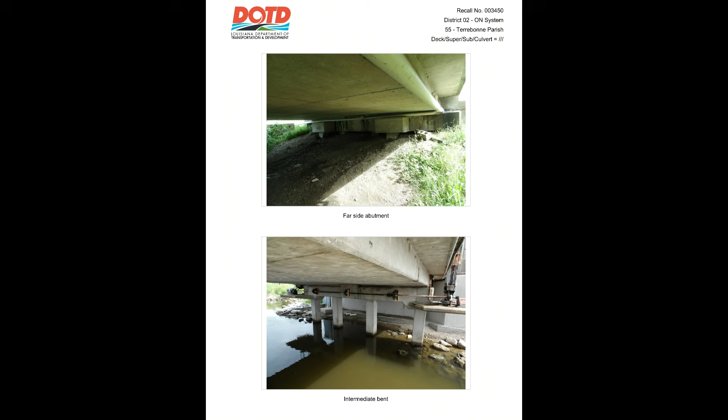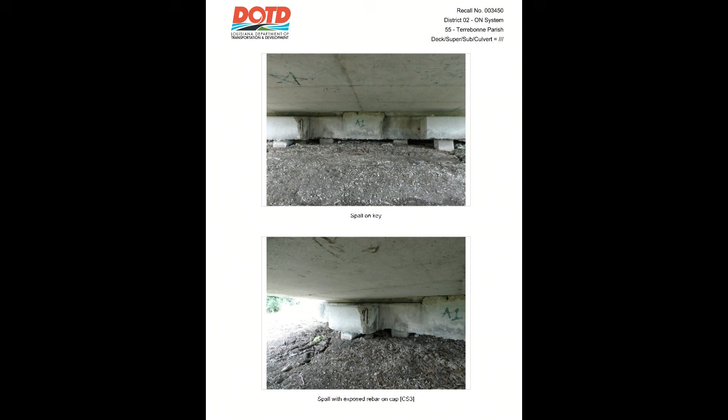Of course, that's kind of how DOTD works. They've got a time frame for everything, so we had a 2026 replacement date. However, this morning I was contacted by DOTD to tell me that they were doing an emergency shutdown of the bridge. So what happened, and I just want to be very transparent with your viewers and with the people of Terrebonne Parish, there was an inspection done by the Bridge City Department of DOTD in June of 2024. That inspection showed critical infrastructure deficiencies, critical problems with the bridge.

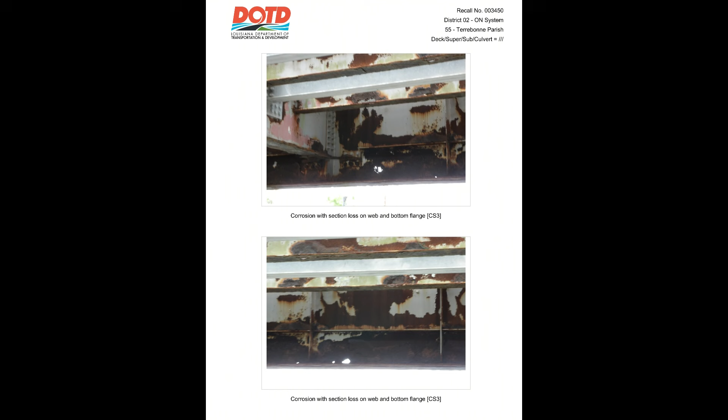June of 2024, I want you guys to remember this, by Bridge City. Bridge City failed to send that report to Baton Rouge. So who are the ones who actually schedule the bridge replacements? So the communication, there was a complete lack of communication, complete breakdown as far as DOTD goes. So they did not send the report with these critical deficiencies to the people here in Baton Rouge who are at the corporate office.

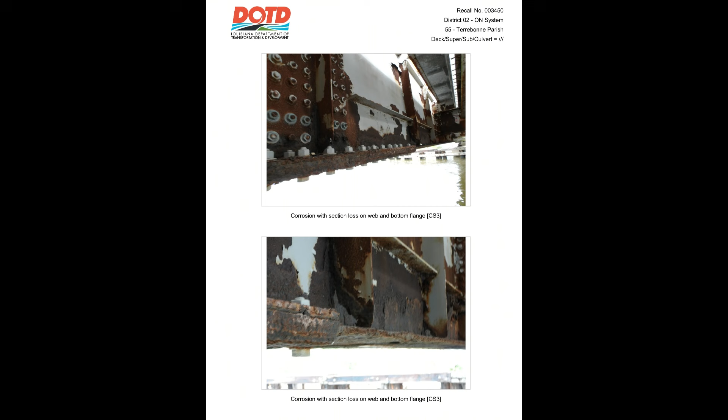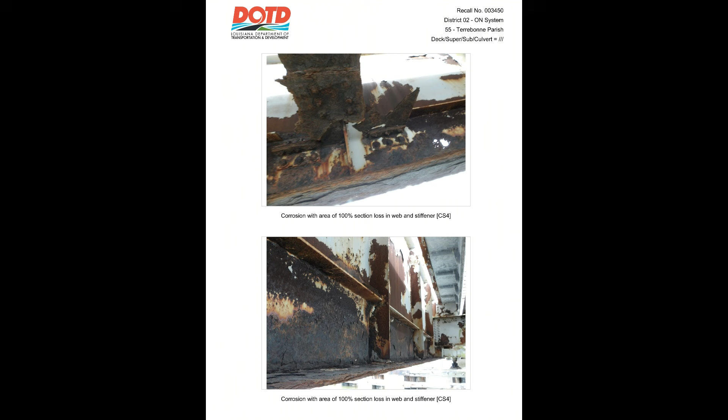So this morning, whenever I found out what was happening with the bridge, I left the House floor. We were voting this morning, left the House floor, went to the DOTD office, which is right down the street from the Capitol. I met with the director of DOTD as well as the head of bridges, and had a very passionate conversation about how upset we were about this. I explained that this cannot happen again. We cannot be out of a bridge again. This is completely unacceptable. There was a complete failure with DOTD, and they agreed that this was completely on them.

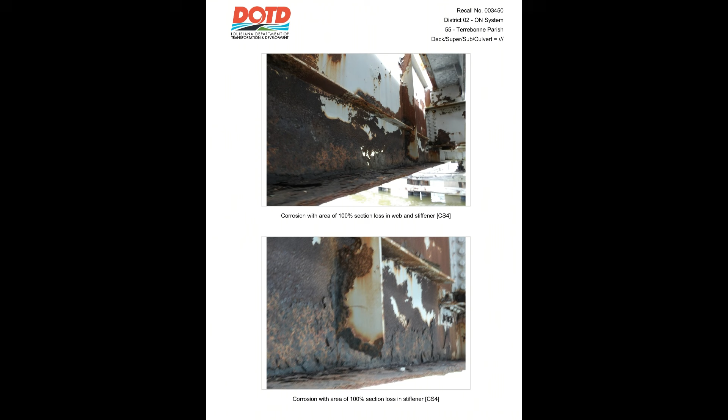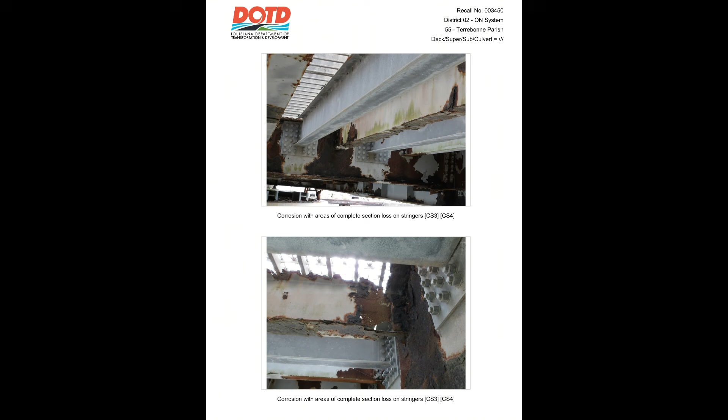This was not related to our local DOTD office. This is not related to a lack of something that happened on the parish point of view. This was a complete failure with them to not receive the report. So when they received the report, they actually received it by a dump truck driver who happened to be passing the bridge, said there's some issues, called in the report, and so somehow they found this from Bridge City.

Jeez. And so we're going to get it down today. That's the kind of incompetence we're talking about right now with DOTD.

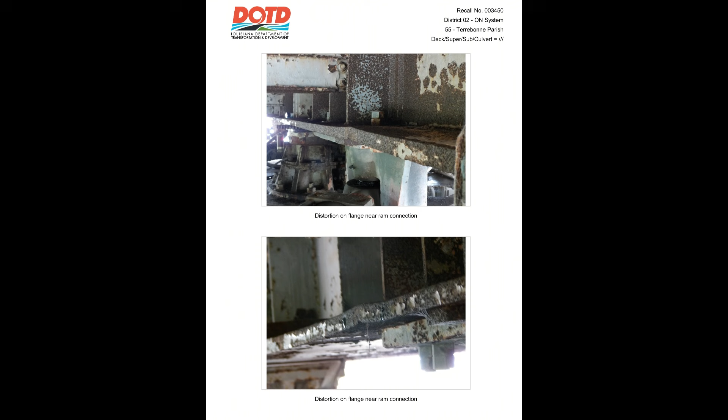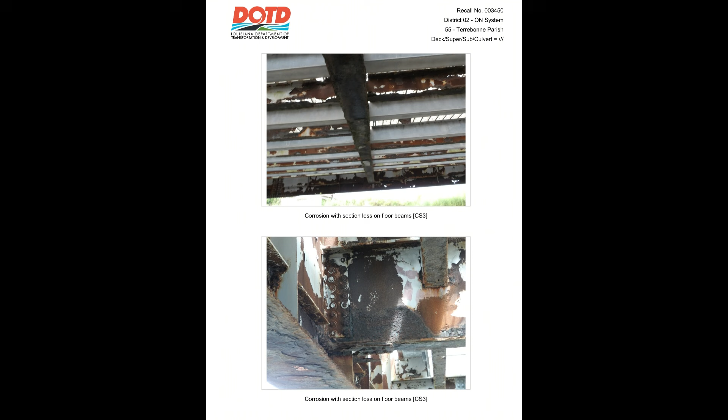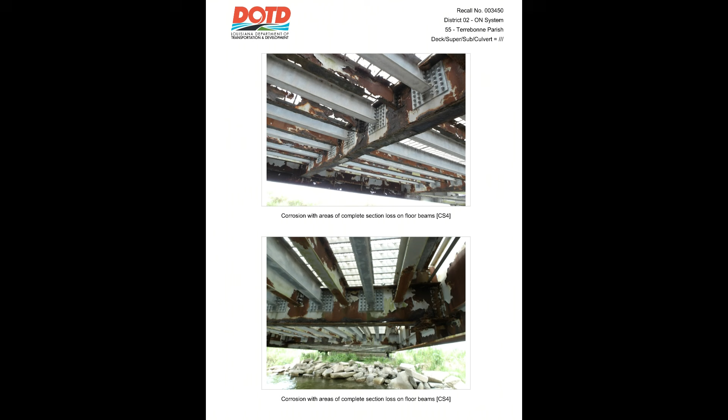Once again, I went to the meeting. They have completely shut down the bridge. We are looking at some solutions right now to get that bridge back up and running, because of course we can't be out of a bridge until 2026 and further, knowing that there's only pretty much one way in, one way out.

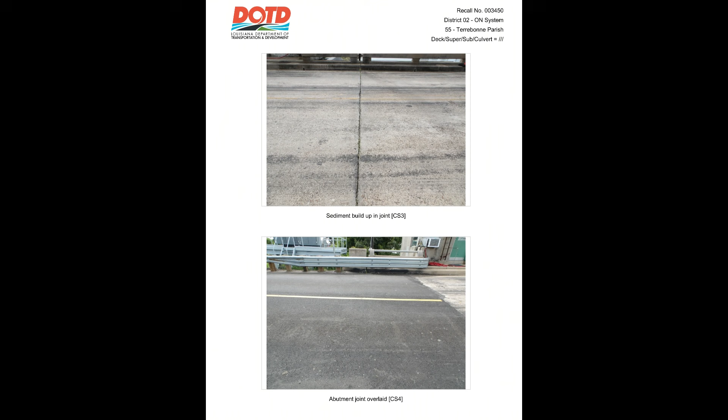Right, so where we are now is looking at all the alternatives. We are looking at some immediate repairs. They're sending some crews down immediately to see if we can repair, and while we're repairing, possibly keep one lane open for traffic. They're also looking at temporary bridge solutions.

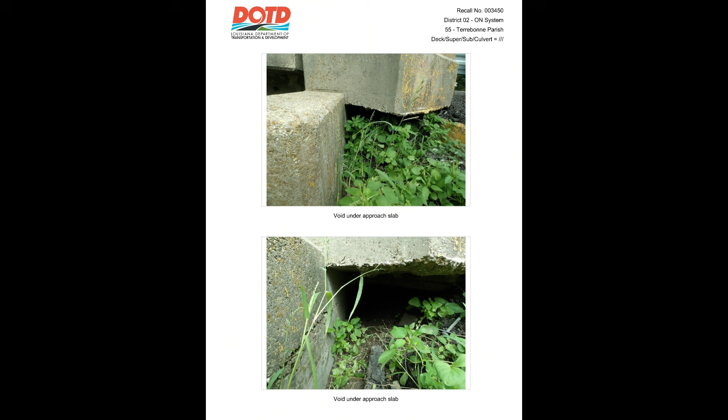We're looking at, and I'm looking at my notes right now, an ACROW, which is an acronym for a temporary bridge, which is pretty cost efficient. Don't let DOTD tell you it's not cost efficient, we can get one for about $1 million. We will have to get a lift bridge though, because there's so much maritime traffic in that area. A lot of the fishing boats have to get to Lake Boudreaux, so we've got to have that bridge open, be able to open back and forth.

DOTD, and these companies that we rent these lift bridges or temporary bridges from, don't have a lot of swing bridges. So if we can get something, it's going to be a lift bridge. Once again, it's just going to be something we're going to have to push really, really hard for.

Over here in Baton Rouge, I've already met with Senator Fesi. I've met with the Speaker of the House, as well as the head of DOTD, letting them know how imperative it is, because we just can't be out of this bridge.

Let me bring in Kim Chauvin. What does this mean? I guess it's good that we're getting stuff done, but this is a real inconvenience. Yeah, it's going to be a major inconvenience because they've already been hit hard with the Robinson Canal Bridge, which was shut down for quite some time, an extended time on that part of it.

And Jessica's been really good, going to bat for us to try and get this done. We met right as I was coming into office, for about the last year and a half, I have been at it.

You were at some of those inspections, right? Yes, and just meeting with Department of Transportation and telling them how imperative it was to have a plan, that it wasn't about if this bridge would break, it was always been about when it would break. I've been there when electricians were working on it, and listening to these people, I'm thinking something is, we've got to get something going. But I've been at this since January.